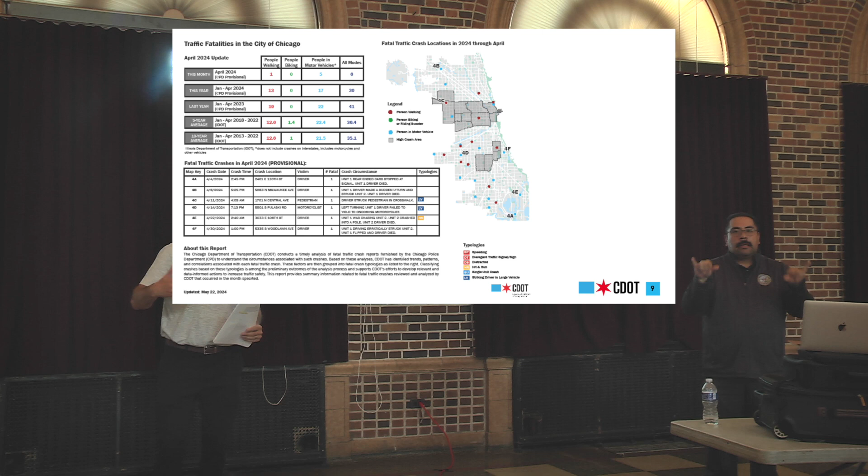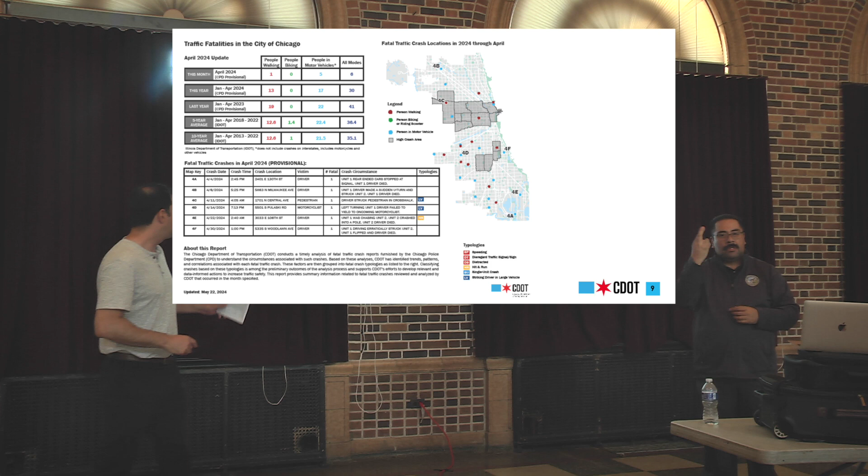Speeding being a huge one, disobeying traffic signals and stop signs, reckless driving, large vehicles is something that we're watching very closely for a number of reasons. So this information is posted monthly and I would encourage people to check it out. It's a really good resource.

Talk about a couple of projects. There's a really exciting project with CDOT and the community and Alderwoman Scott on Independence Boulevard to install a new pathway system. The pathway is in place, basically around Polk and Taylor right now. It's going to continue to be extended, with additional landscaping and everything, but it's really an effort to activate the boulevard system, which is such a great asset within the community.

The Douglas Boulevard side has a really nice walking path that people can hang out on and enjoy, and so that'll extend the path on Independence going north. And again, as I mentioned, that really complements and highlights the protected bike lanes that we installed on the boulevard system over the last couple of years.

So just a couple of photos. This is, like I said, between roughly Polk and Taylor right now, but this construction is going to continue on throughout the year. Speaking of the boulevard system, I'll plug our friend and partner Jonathan Kelly from the Lawndale Pop-Up Spot.

He's done a really great job organizing community events and street closures on Douglas Boulevard. We've worked with Alderwoman Scott to close down several blocks of Douglas Boulevard to car traffic and open it up for people to come celebrate. There was one last weekend that sounds like it was really successful, and there's another 5 or so over the course of this summer. We're partnering together to close down the street to car traffic on Douglas between Central Park and Lawndale, in front of Stone Temple Church.

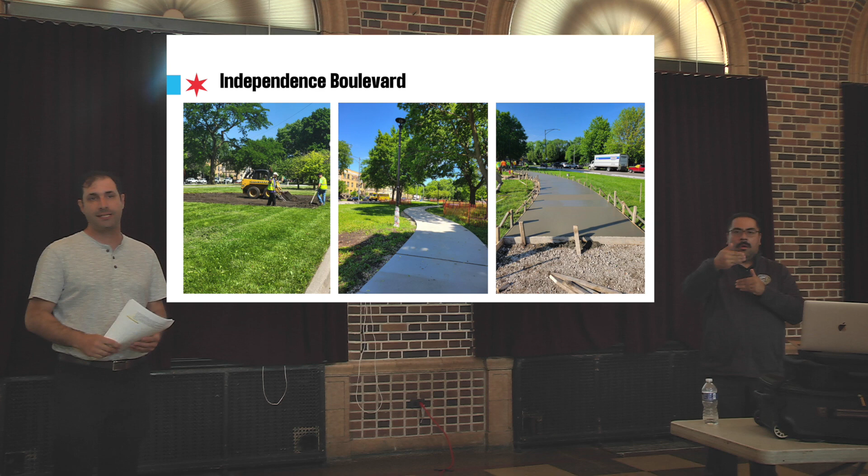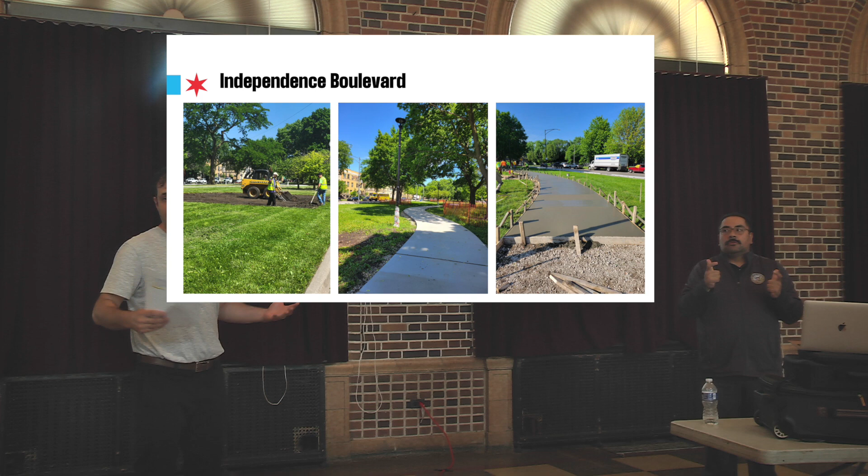There's a lot of great community programming, so if you're interested, talk to Jonathan in the blue shirt for all the dates. I can't remember them offhand, but there's another 5 or so coming up. We've been doing this the last couple of years, and it's been incredibly successful—a great opportunity for people to experience what our streets can be when they're not focused purely on moving automobile traffic, but designed for people to enjoy the largest asset in the city, which is our public space.

The next one, Damen Green Line. This is under construction. I don't know the exact timing of when this will be completed, but this is a major rail transit project with a new station close to the United Center.

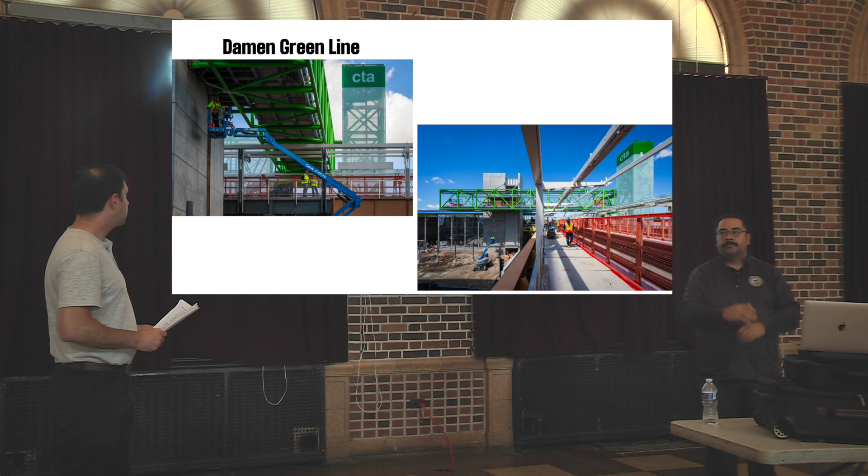Highlighting a really cool project some of you may have heard about: Chicago and Halsted is getting reconstructed starting later this year, early next year. We had a public information meeting last week where we presented a revised design incorporating a lot of really cool elements, including dedicated transit lanes on Chicago Avenue through the Halsted intersection, to the east and west, linking up with existing bus lanes. Also including some really nice bike improvements on Halsted, which I'll get to in a second.

In advance of that project, we actually started striping new dedicated transit lanes on Chicago, both east and west of Halsted, in the last couple of weeks. That work is ongoing and will finish up in the next couple of weeks. Additionally, between Sangamon and Larrabee, right around Halsted, we're also in process, or just wrapping up, between Western and Grand in Humboldt Park, extending the existing bus lanes from Ashland to Western, and continuing west to Grand.

So basically from Grand to Michigan, we have some sort of dedicated transit lane—about 4 miles the whole way. There's one gap between Ashland and Milwaukee, which we're working on in partnership with CTA, looking at that closely. That'll be coming along soon, but it's very exciting to see the Chicago Avenue corridor, a really important transit corridor for many people and communities, making a lot of progress. We're very excited about that.

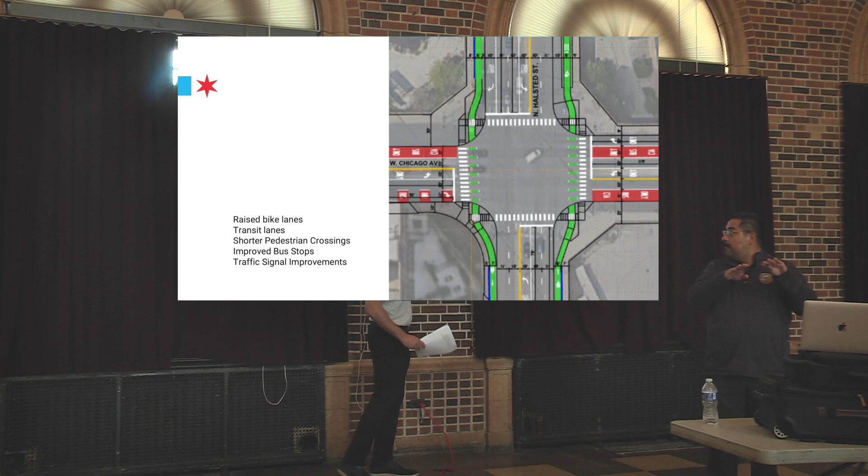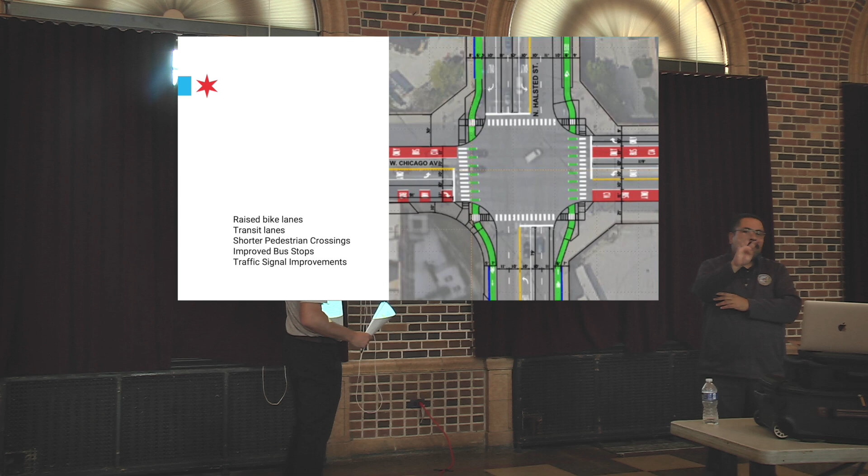On Halsted, we've got raised bike lanes at the same level as the sidewalk, so protected and elevated. At the intersection itself, the corners—these black lines will be the new designs of the corners with the project. Here is the existing curb line as an example. We're really shrinking the intersection, shortening the pedestrian crossing distance by 30 to 40%, and slowing down right and left turns, which will make the intersection safer and more comfortable for everyone.

So I think the changing of the curb lines and shrinking of the intersection is a huge benefit, particularly for people walking. In addition to the elevated bike lanes, we've got some nice bus stops on Halsted—priority bus stops where the bus stops in the travel lane.

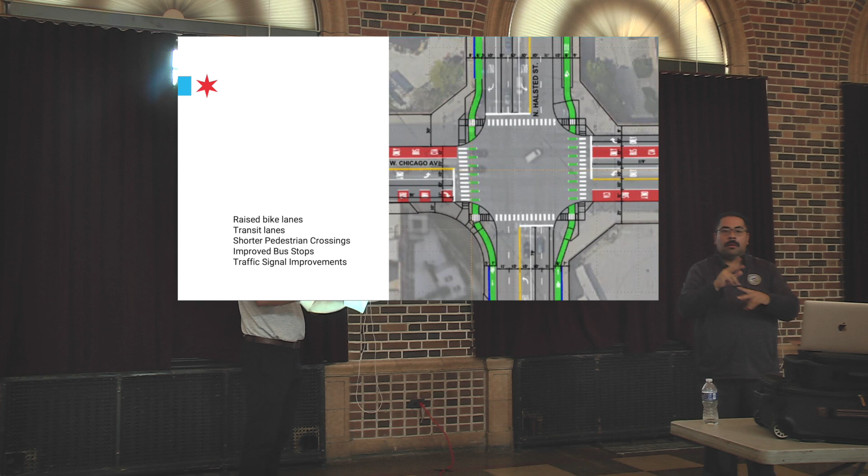The bike lane will be routed behind the bus stop, so there's no conflict from the bus pulling into the bike lane. Pedestrians have the sidewalk space, bike space, and then there'll be a space to get on and off the bus. This will make it easier for the bus to deploy the ramp, get people on and off who are in a wheelchair, stroller, that kind of thing.

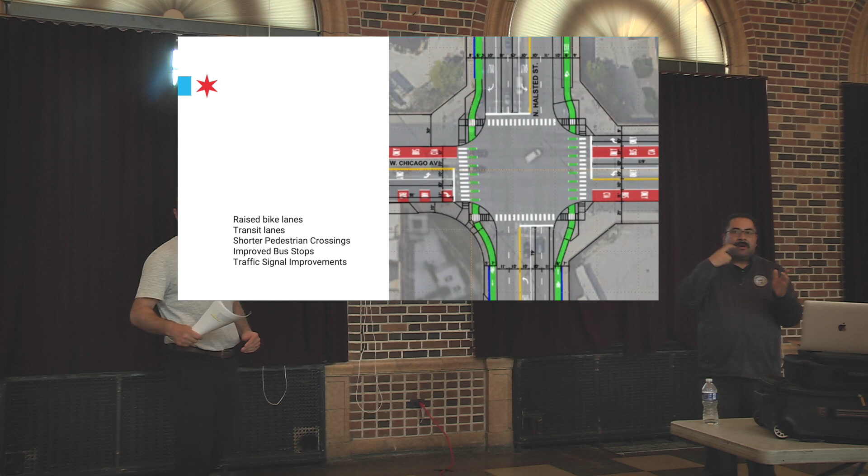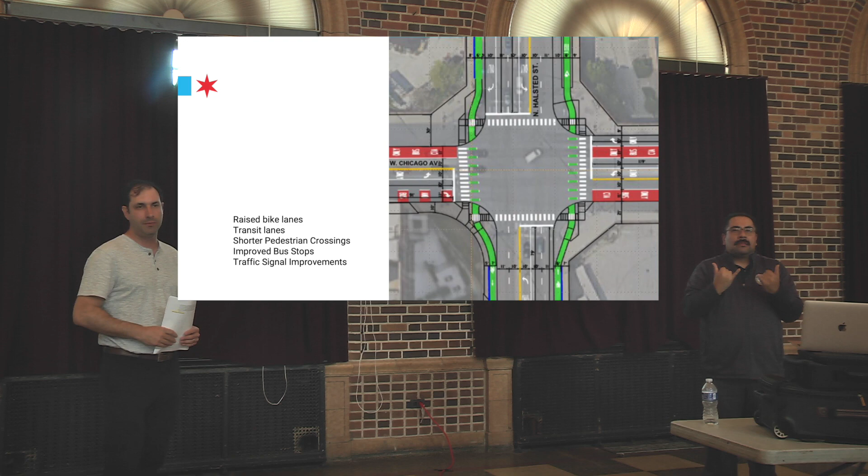So this is a very exciting project. It's been a long project. I definitely see a few faces here who have been very involved in the meetings, and really appreciate the partnership on this. Very excited where this is going. There'll be more info coming up over the course of the summer, but I think this is going to start late this year, more likely early next year in terms of construction.

I mentioned some of the work we've done here in North Lawndale, but other communities as well, also South Lawndale, Little Village area—this neighborhood bike network process and strategy, where we're working hand in hand with the community and working backwards. Really the last thing we start talking about are streets. The first thing we talk about is the perception, the culture around transportation, the barriers, the opportunities within the neighborhood—both physical barriers like a viaduct, or invisible barriers that really only someone ingrained in the community, who lives here, would know. We've seen a lot of success with that effort.

The goal is to expand the tent, bring in people working on issues of public health, mental health, youth engagement, local businesses, economic development, sustainability, public safety, and really understand the connection between biking, walking, transit, safe streets, and all these quality of life issues that are top of mind for people. When we talk about a protected bike lane or shortening the crossing distance at an intersection, it's not just about a couple of feet of space to ride a bike or cross the street—it's about creating a community that's welcoming to everybody and achieving a larger set of goals.

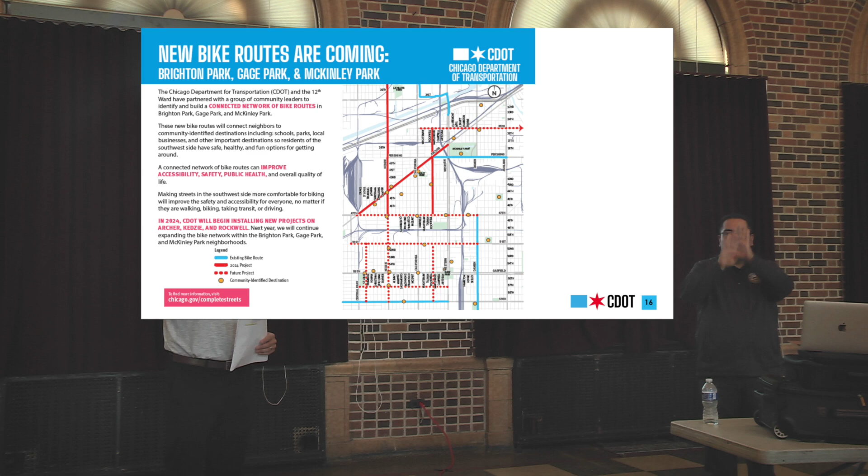We're doing that all over the city. We've got a lot of really cool improvements happening around Portage Park Elementary and Portage Park, including some raised crossings and pedestrian improvements. Also Nash Elementary in the West Garfield, Austin neighborhood off of Cicero, around Cicero and Erie. That's a program we're continuing to develop, but schools and parks is really a focus of where we're going in the future.

Okay, next. I think this is my last slide, and there are so many updates and exciting things I want to share that I'm way over time and we don't have time for. But if you have questions or want to chat, just grab me - I'll be here the whole time. There are so many really cool projects and initiatives happening all across the city.

This is a couple of photos - Clark Street in the River North neighborhood downtown. We've got a protected bike lane under construction, along with pedestrian improvements, from Oak down to Grand. That's basically where Clark Street converts to a one-way street southbound. This is under construction as we speak: curb protected bike lanes, pedestrian refuge space, and bike signals at some intersections. This should be completed in the next month or so, and will serve as a couplet to the Dearborn protected bike lane, which goes northbound north of Kinzie.

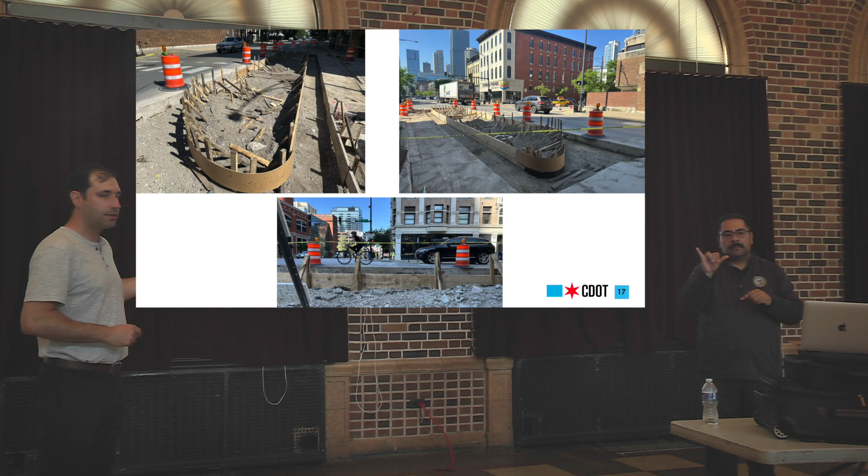So I think that's all. Again, thank you for being here. Look forward to the conversations at the tables, but really appreciate the partnerships with everyone. I think that's been really key to the success we've been having and will continue to have in the coming years. So thank you.

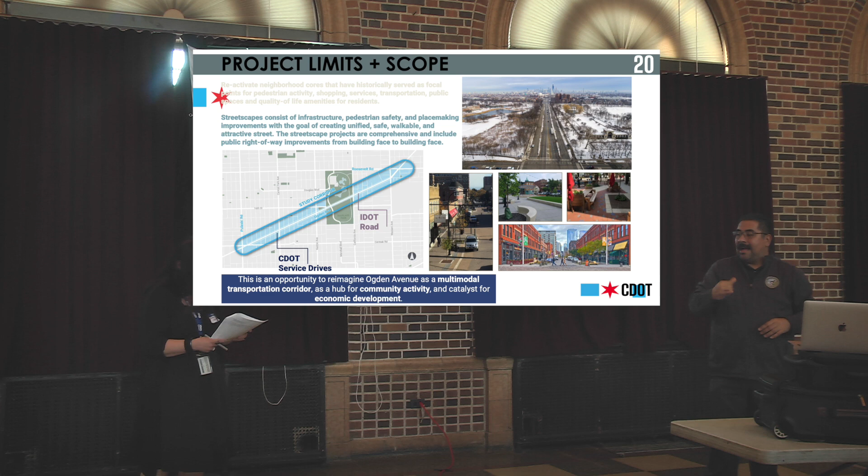This is a streetscape project, which consists of infrastructure, pedestrian safety, and placemaking improvements, with the goal of creating unified, safe, walkable, and attractive streets.

The project is comprehensive and includes public right-of-way improvements from building face to building face. We include public outreach, placemaking, urban design strategy, concept design engineering, detailed design engineering, and construction as part of this effort. So it goes from concept development to construction.

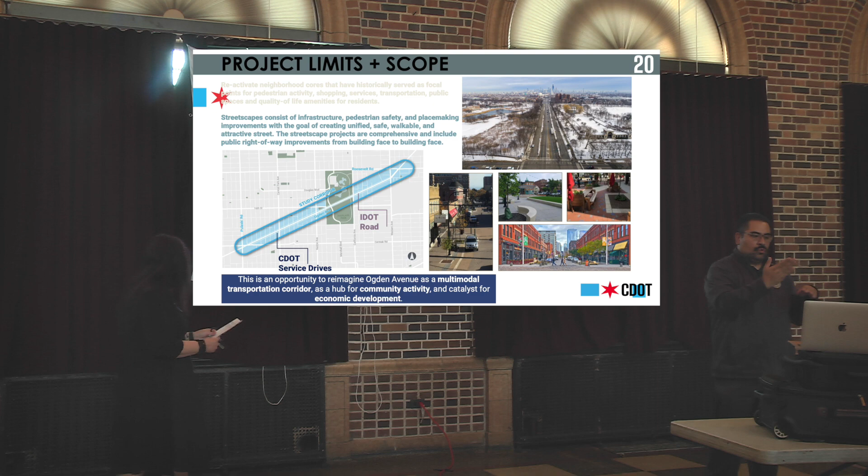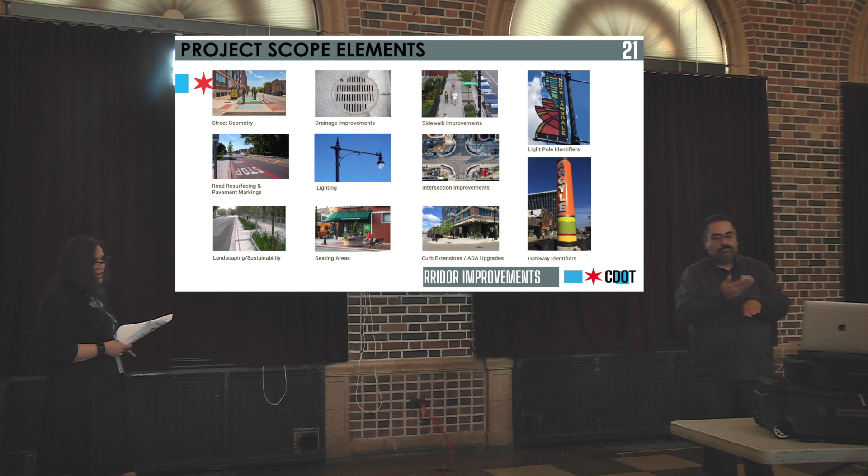Here you can see some of the scope within our project, which includes a variety of improvements, such as street geometry, drainage improvements, sidewalk improvements, road resurfacing, pavement markings, new lighting, landscaping, seating areas, curb extensions, intersection improvements, and corridor identity items such as light pole identifiers and gateway identifiers.

We want to acknowledge the 2018 NLCCC Quality of Life Plan. We've worked with Ms. Rochelle Jackson in many, many meetings for this project. This will have a strong influence on the project as we develop concepts and have our ongoing community engagement.

So we are early in the design process for the Ogden Avenue project. Right now, the team is focused on gathering community feedback and developing those initial concepts.

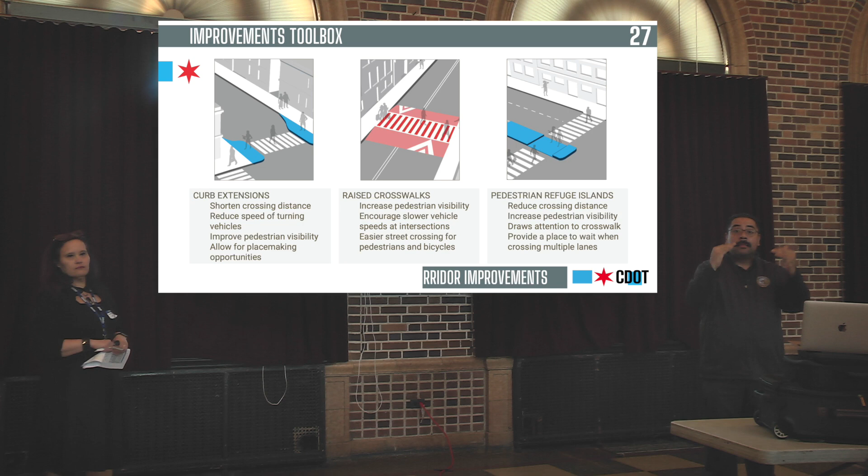I won't get into a lot of this because I'm probably close to my 10 minutes. So we have a toolbox of safety features that we know we can implement along different corridors that will improve traffic, pedestrian, transit user, cyclist, and vehicular safety along the corridors.

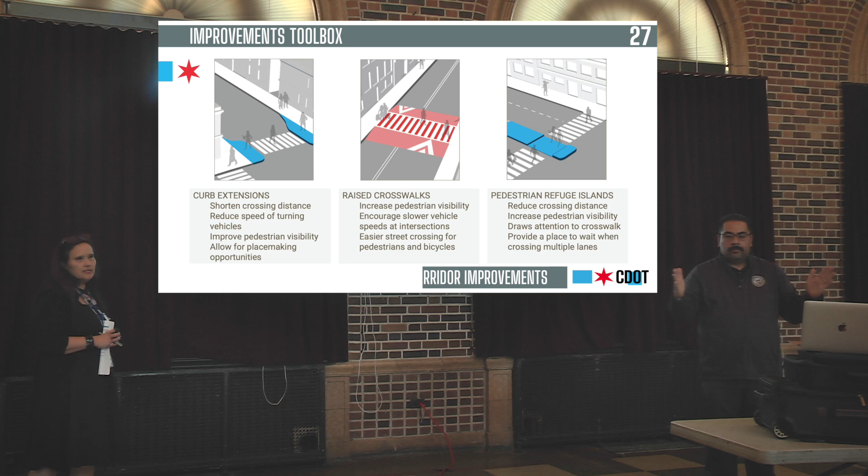And some of those that we are using for Ogden include curb extensions for shortening crossing distances, reducing speed of turning vehicles, improving pedestrian visibility, and that also allows for extra space for placemaking improvements.

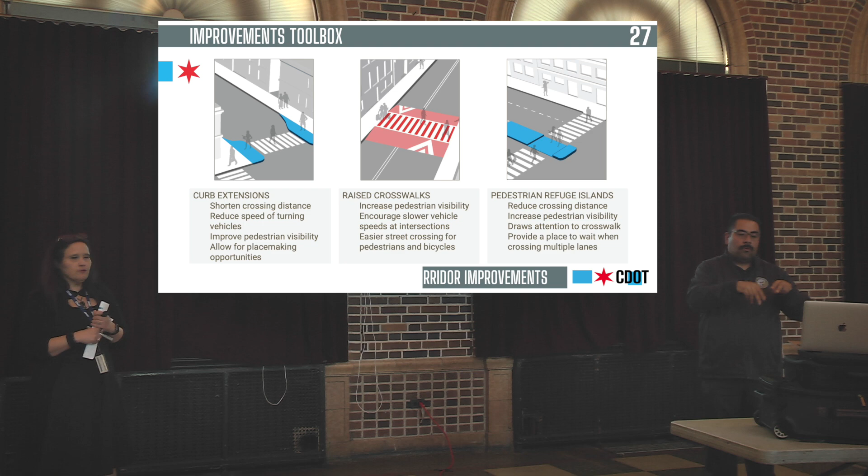Raised crosswalks to increase pedestrian visibility, and it does encourage slower vehicle movement at those intersections on the side streets, and it makes it easier for pedestrians and cyclists to cross, especially if you have a bicycle lane that's on the sidewalk.

Pedestrian refuge islands again provide a place for pedestrians to stop as they're crossing the street, and it shortens that distance. It draws attention to the crosswalk and provides a place for pedestrians to stop and wait for traffic to go by. Next slide.

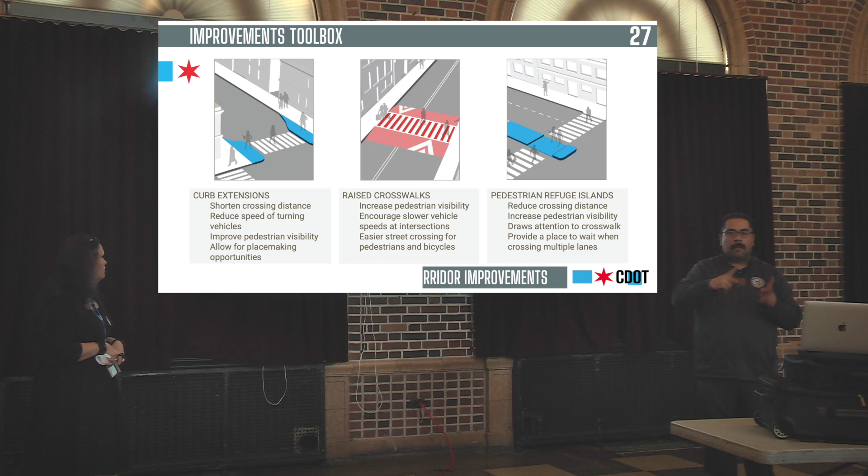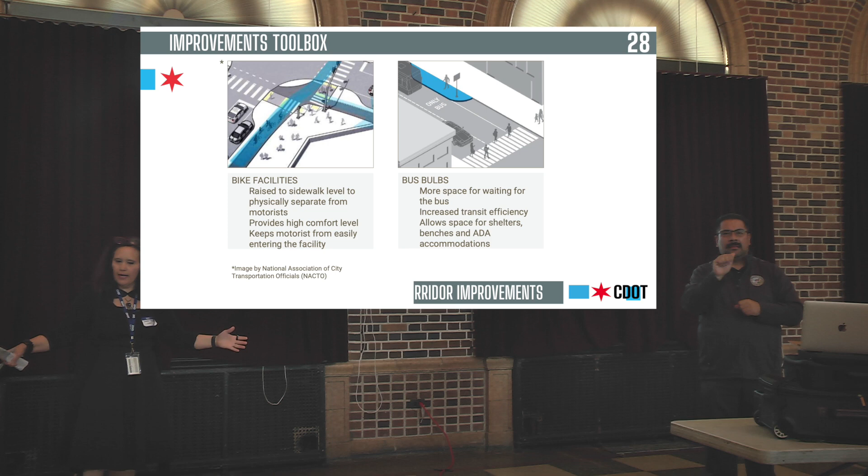Bike facilities. We're looking potentially at a raised, sidewalk-level bike facility that's separate from motorists. The thing about Ogden Avenue is that it's really wide, so we're trying to figure out what does that mean, how wide does it need to be for the traffic that's going through, what are the opportunities for placemaking and spaces for the community, but there are limitations, like parking. The service drives do have parking, and some of that parking is needed. So we're trying to come up with a balance of what that means and what the community wants to see along Ogden.

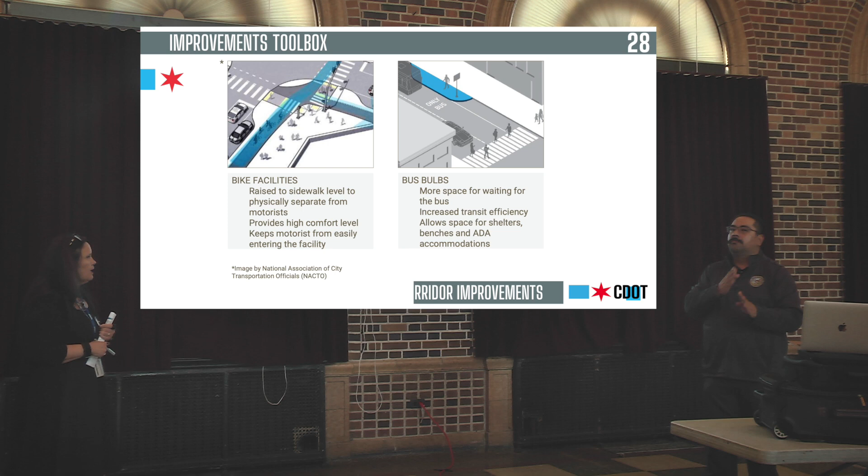Bike facilities on the sidewalk provide a high comfort level, and of course keep motorists away from entering the bike lane. Bus bulbs will provide more space for waiting for the bus. It increases transit efficiency and allows for additional space for ADA accommodations and bus shelters.

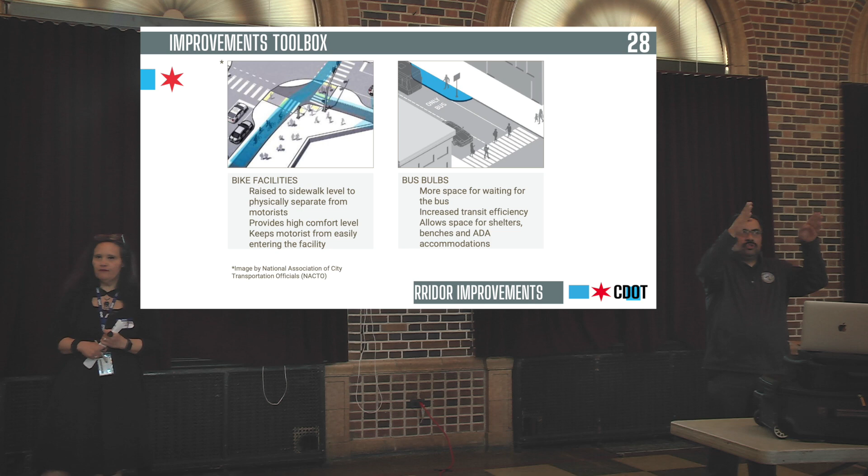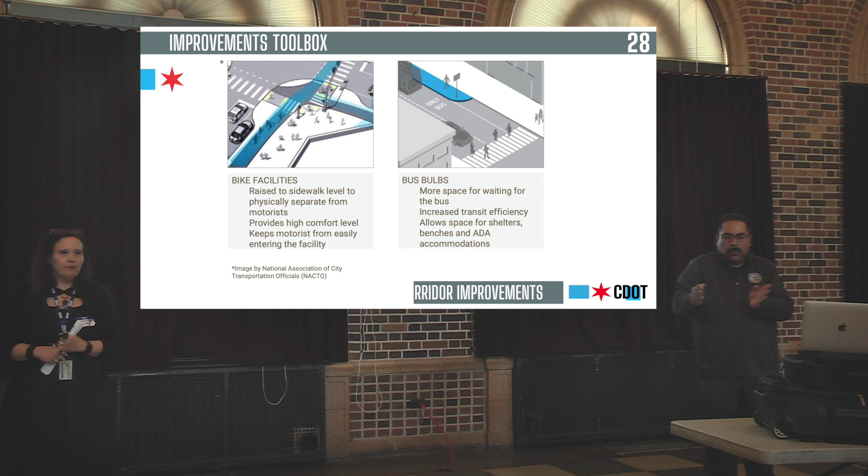I wish I had some pictures of Ogden, but if you are familiar with Ogden Avenue, the bus stops mostly sit on the median, and the median is like 2 feet wide. So people are standing literally in the middle of what feels like a highway, waiting for the bus with nowhere to sit and basically almost nowhere to stand.

So in the last workshop, we shared 2 concepts with the community, and we're going to call those Strategy 1 and Strategy 2. There were 2 potential baseline design strategies that we presented, and both strategies use the tools that I spoke about earlier, but they do have some key differences.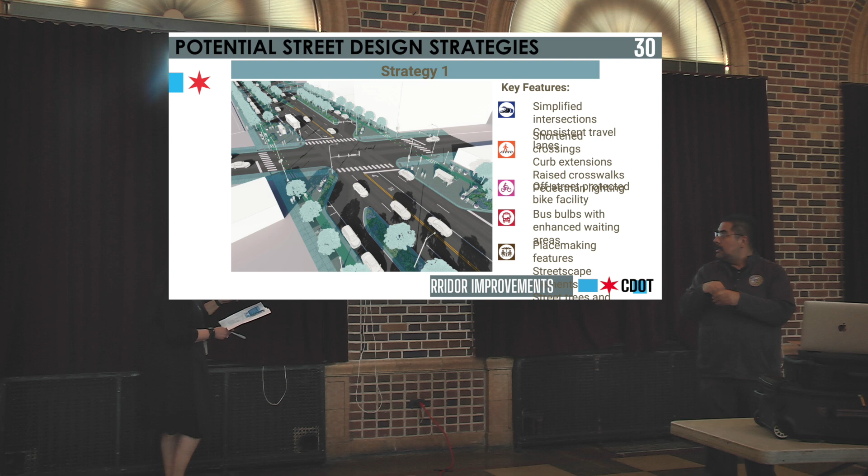Strategy 1, which is the one you see on the screen now, maintains parking within the service drives. It improves safety for all roadway users. It adds a row of trees in a furniture zone adjacent to the sidewalk.

It provides a protected bike lane adjacent to the service drive parking, that's the green line you see right here. Under this strategy, service drives can be closed and repurposed on a case-by-case basis, depending on parking needs and adjacent land uses. Service drive closures at selected locations can provide additional sidewalk space for pedestrian use and open spaces.

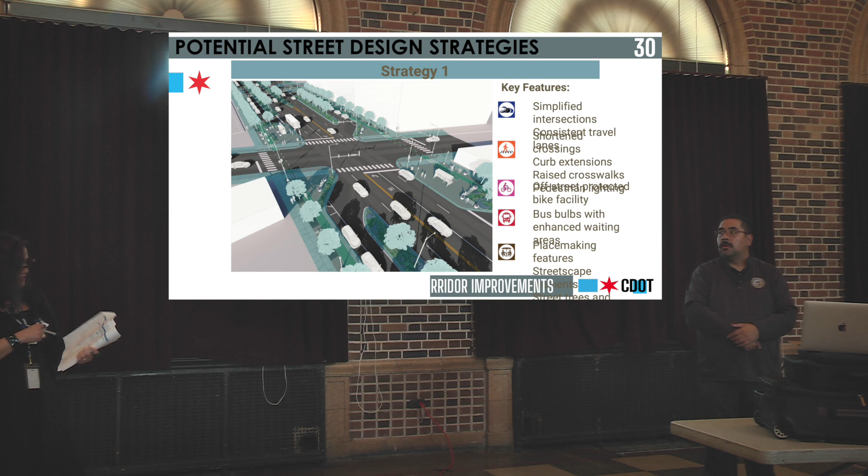So strategy 2. Again, strategy 2 has the same baseline, but the service drives are closed and parking is relocated from the service drives to a parking lane adjacent to the main travel lane. The service drives are repurposed to provide more space for pedestrian use, landscape, and other placemaking amenities.

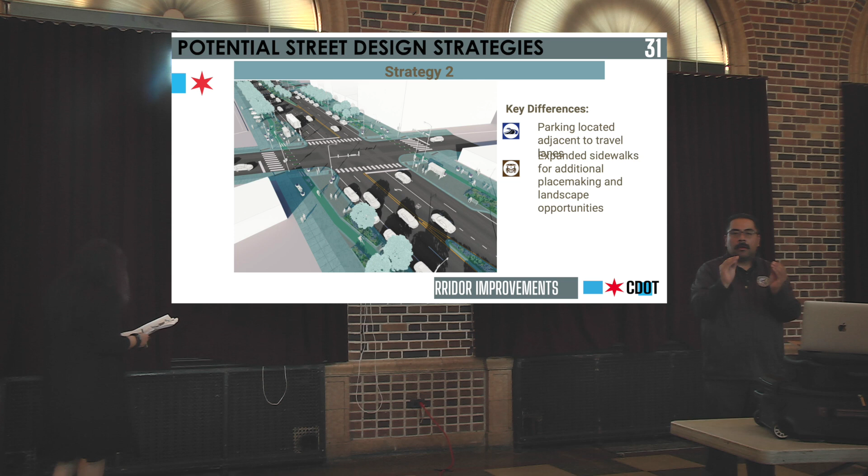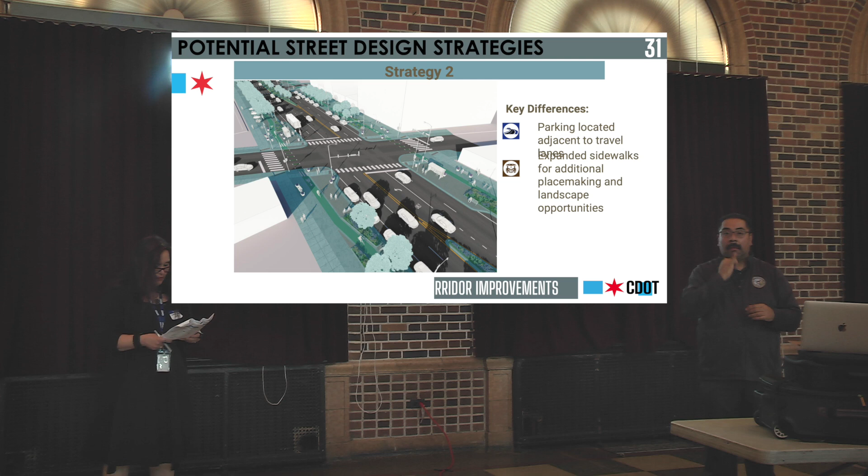Closing the service drives provides a wider landscaping zone and streetscape zone, which could help activate the corridor, such as outdoor dining areas and public seating spaces.

The space also allows for a landscape buffer to be added between the parking lane and the furniture zone, and it allows for a double row of trees instead of a single line of trees as shown in strategy 1, to be installed on either side of the bike lane.

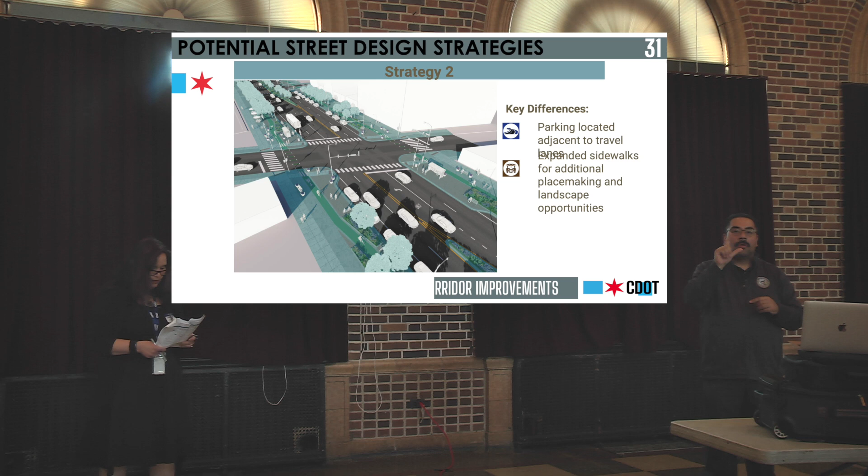The city will be looking to get more feedback from the North Lawndale community on the preferred strategies to develop and refine concepts. We're currently in those conversations with the community. There's a survey that we're going to be sending out to really get additional feedback on which strategy the community prefers and how we balance all of these needs.